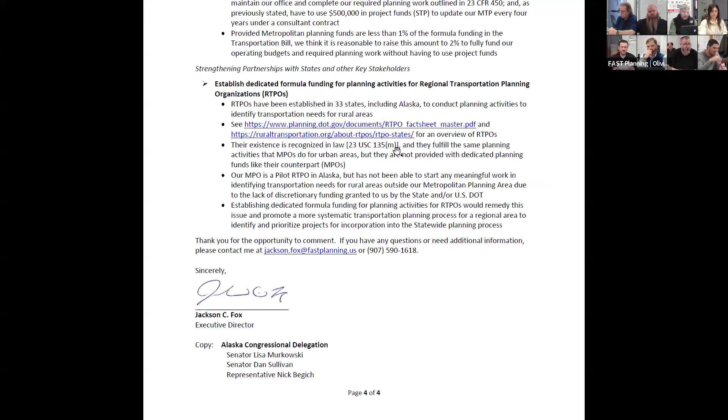Hey, hearing none, we'll move on to our public comment period. Is there any member of the public who wishes to provide testimony today? But anything not listed as an action item? And there are no action items, so even things on the agenda are fair game at this time.

Don't see any in the room. Anyone online? Okay, not seeing anybody online, so we'll go ahead and close the public comment period.

Move on to old business, Chena Riverwalk Stage 3 project update, which begins on page 18 of the packet.

As I stated in my staff report, the Chena Riverwalk has been on the policy board agenda for a couple of meetings, and it will continue at their April 15th meeting for some potential motions to make with relation to the future of this project.

As shown on page 18, you can see the current alignment as designed for the pedestrian bridge to Pioneer Park along the route on Peger Road is in a separated path along Peger Road up to Phillips Field Road. And then behind that is my staff memo to the policy board on some of these decision points with relation to the design, just as a refresher.

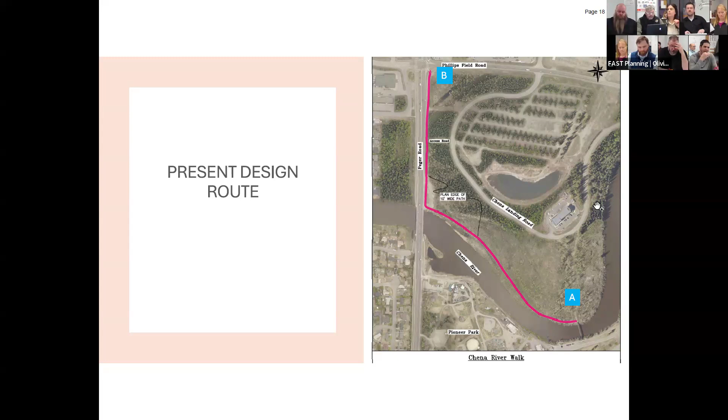On the design side, the construction estimate has risen from 1.7 million up to 7.1 million, largely due to the cost of the boardwalk structure. That's 1,378 linear feet along the riverfront there.

The current design tries to keep the path alignment outside of the floodway, but we've heard since from the community planning department that that's a permitting exercise. Potentially there could be construction in the floodway.

Really the next step for this project is to hire a structural engineer to take a look at the design, a geotechnical team and hydrology team to see what is possible to permit within the floodway, in hopes that we can shorten the length of the boardwalk to some extent to reduce the overall cost of construction of the project, since the boardwalk is the most expensive component.

So this is a decision point for the policy board on how to move forward with this price tag of the design. On the maintenance side...

Again, there is no signed maintenance agreement currently for the project. Previously, the project was moving forward underneath a maintenance agreement signed between the railroad and the city of Fairbanks under a land use permit. But now that the right-of-way acquisition option is outright purchase of the property, there's no need for that permit to exist any longer.

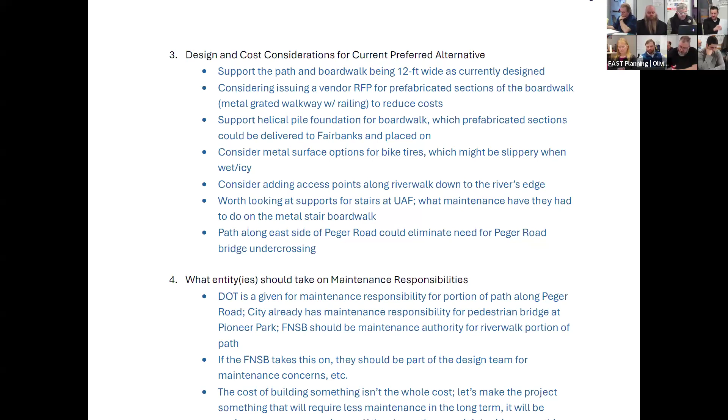All right, just a couple more, next page. As for consistency with local plans, they wanted to point out that the project has been in the Chena Riverfront plan for decades. For the last couple decades as well, it's been in our long range transportation plan and our first non-motorized transportation plan, adopted in 2012, and it's still in there in the 2021 update for our non-motorized plan.

It also directly supports the vision of the Pioneer Park Master Plan to expand the relationship with the Chena River, and is consistent with the statewide comprehensive outdoor recreation plan, which cites loops and strolling as highly participating activities in and around Pioneer Park. So bottom line on this page, the committee said: do it, move forward, don't change the alignment of the project. They have a lot of very specific recommendations as to how the project could proceed.

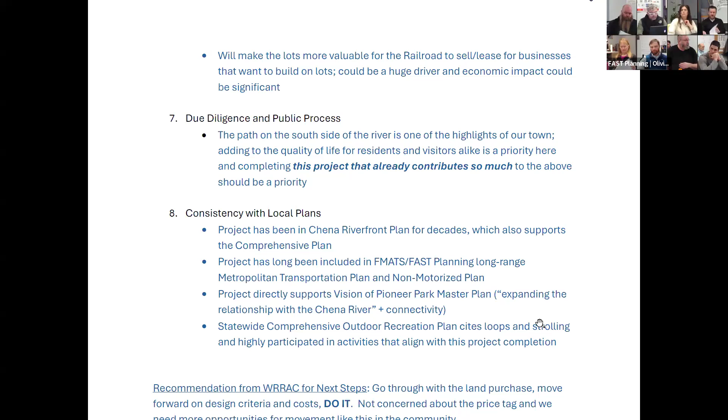And then behind that, beginning on page 26 and 27, was a copy of all of those local government resolutions and support from 1987 to present. There may have been some I've missed, but those are all the ones I had easily accessible on file for the project.

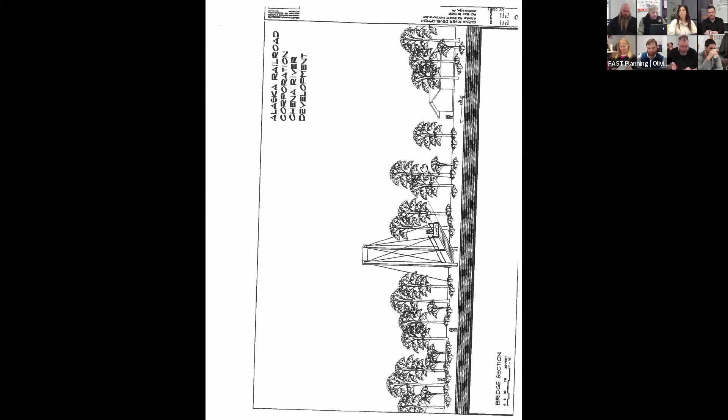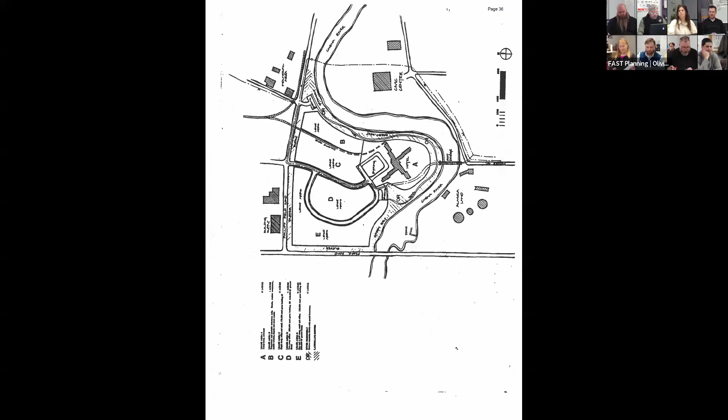Again, this is not an action item today. At the policy board meeting on April 15th, public comment period will remain open. Hopefully some new folks will show up to provide testimony regarding the project. So this is more of an informational update for you all to follow along, but happy to entertain any questions or discussion on this item.

Anyone in the room or online?

One second, talking about the Chena Riverwalk, I guess. 39 years of talking about it is enough. You're just going.

Okay, yeah, Kelly? I'll make a comment slash question. I'm not sick of talking about it, I've been talking about it for 16 years. The Chena Riverfront Commission has been really involved in this project as well.

I was a little surprised at the last technical committee meeting when the option was floated of not having the Riverwalk on the river, but rather on Chena Landing Loop Road. I didn't know that was really an option being considered. Would it be helpful to also bring that concept back to the Chena Riverfront Commission to see if they support consideration of that option, or was this project originally scoped just along the river?

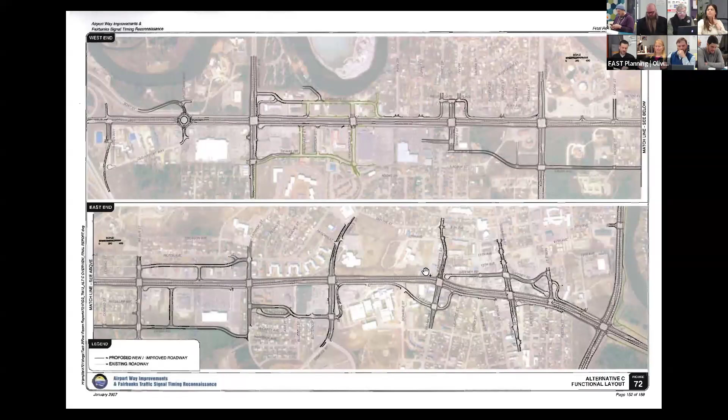One is a new signalized intersection at Moore Street, which is the entrance to Pioneer Park. Currently that's a right-in, right-out only. So if you're traveling eastbound, you can't take a left-hand turn into Pioneer Park, you have to go down to the Wilbur Street intersection at that stoplight, take your left-hand turn there, and then backtrack over to Pioneer Park.

And then another one I thought was interesting was on Barnette Street. It says convert Barnette Street to a two-way street from Airport Way down to 10th Avenue. Currently it's only a two-way street to Gaffney Road. But if you made it two-way down to 10th, it might improve access to downtown or even access to Barnette Magnet School and the clinic on the corner there. So that's a low cost, high impact project in my opinion.

I don't know that this has ever been discussed since 2007. I was kind of surprised when I saw it, I didn't remember that recommendation, but that could be a simple project if it's supported.

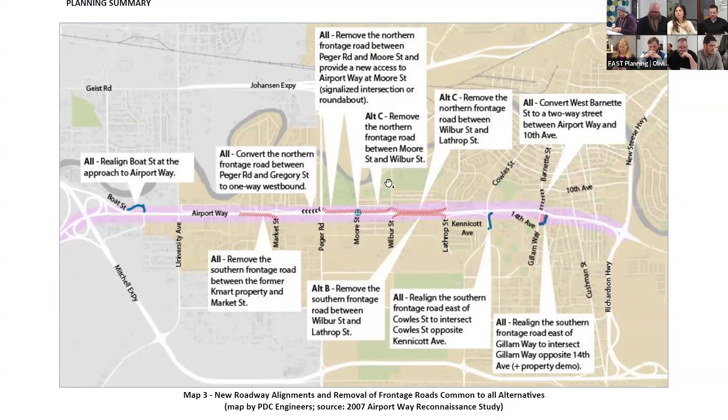Okay, and then last is the design toolkit and site specific recommendation. Cover for that report is on page 68. Olivia, if you go to page 72... all right, 73. So this was a two-part report. One was a design toolkit for beautification features on Airport Way, and then there was a second chapter for site-specific recommendations, looking section by section of Airport Way at what specific improvements would be good. For the landscape features in this design toolkit, I'll share a couple of them with you.

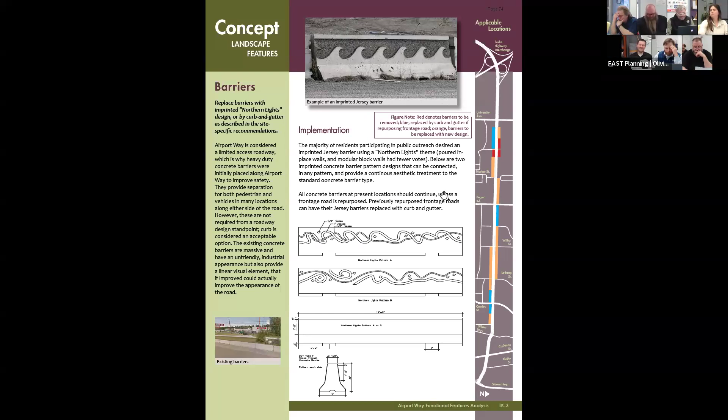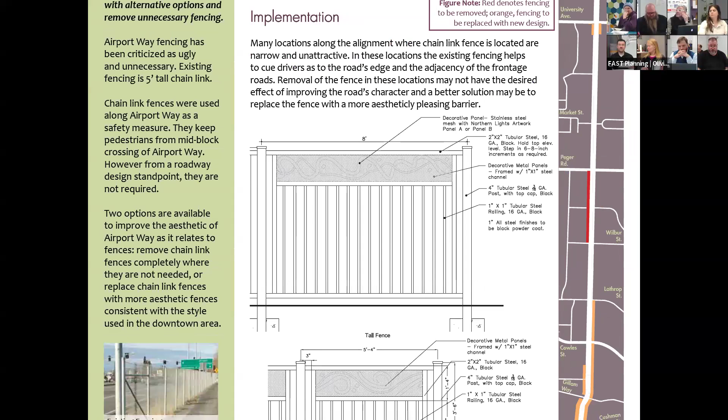If you go to the next page, it looked at a more aesthetically pleasing Jersey barrier on Airport Way, where the Jersey barrier itself would still stay. And then the next page shows potentially replacing the chain link fencing with more decorative fences, which would be an expensive project. You wouldn't necessarily go forward with this exact design, but any improvement or alternative to chain link, I think the public would appreciate. And then behind that is the site-specific recommendations.

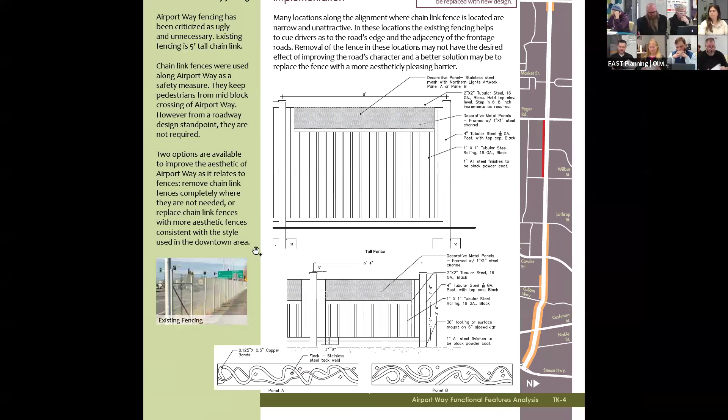There are descriptions of 7 different site-specific recommendations, but page 80 in the packet has an overview of those.

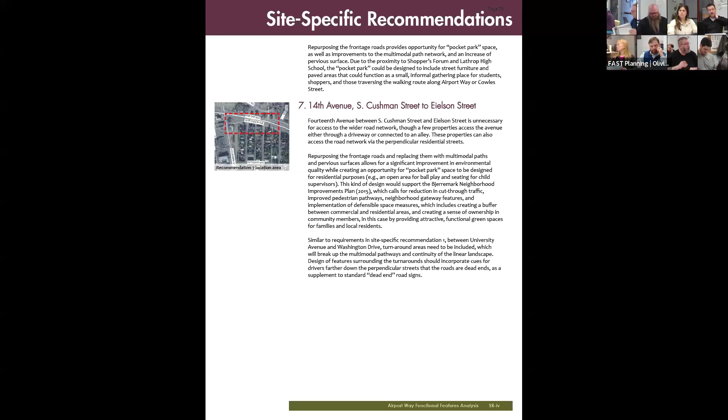Similar to the original study, a lot of these recommendations relate to not removing frontage roads, but converting them into bike and pedestrian corridors with improved, widened pathways and more landscaping features, while prohibiting vehicle traffic on some of those frontage roads.

Another interesting one is looking at Moore Street, as opposed to a signalized intersection there would just be an opening in the median. So you could do right-in, right-out at Moore Street, and make a left-hand turning movement into Moore Street, but you couldn't make a left-hand turn out of Moore Street. So you could do the northbound movement, but not the southbound left turn. That's an alternative to a signalized intersection there to improve access to Pioneer Park.

There was also discussion of a right-in, right-out at Pioneer Park's main parking lot along Airport Way. Again, that would be right-in, right-out, but with a new driveway providing direct access to the parking lot, as opposed to going down to Moore Street and taking a left into the parking lot.

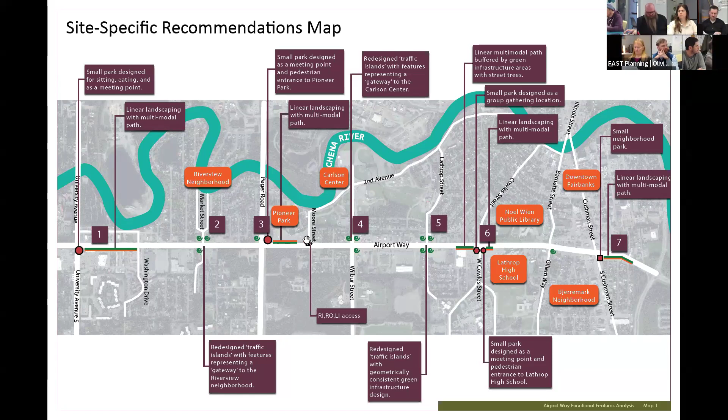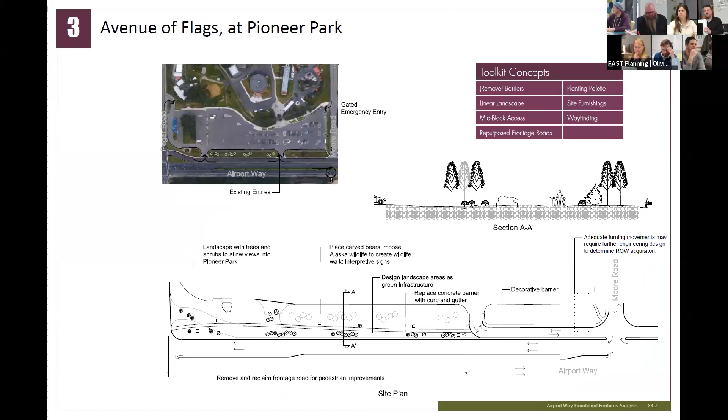There are figures associated with all of these behind this, but I'll stop there and see if any of these ideas elevate the need to pull them out of these plans and list them specifically in our long range plan, so they can be considered for advancing to design and construction in our next TIP document.

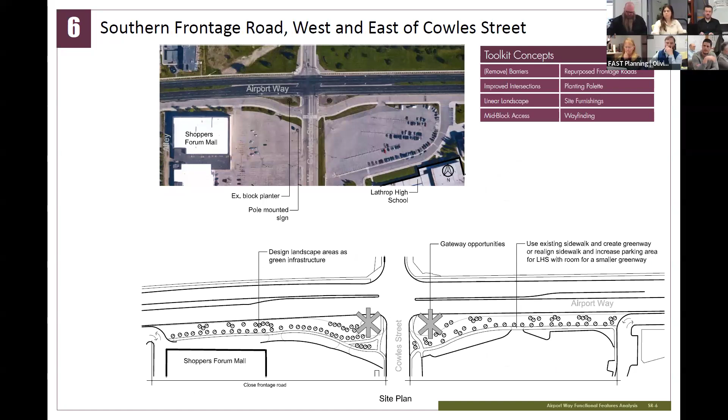We are going to be having the same conversation with Policy Board, as well as the Walk, Ride, and Roll Advisory Committee and the Project Enhancement Committee. So you guys are first up to take a look at this and think about it.

Yes, Tim? That Barnett at 10 — obviously we're looking at Barnett right now, so I wouldn't be against it. I remember Cushman used to be open from Gaffney to Temper for two-way traffic, and we changed that with the Cushman streets. There's pros and cons, like you say, but I never liked how abrupt Barnett is at Gaffney.

So I don't know if that can be incorporated into what we're doing now with Barnett. I mean, it should — that way we can do that typical, or at least consider it. Yeah, I'd like to see that get considered.

That's the type of input I'm looking for.

Yes, John? What initially got us zoned in on looking at all of Airport Way for some kind of improvements? Did we fall into some kind of money or something?

So right now, it was voted the ugliest road in Fairbanks as far as our public input process. And at our last steering committee meeting for our long range transportation plan update, we were talking about the needs assessment — it was a 2-hour meeting, and we spent an hour talking about Airport Way. So with the steering committee, it was a hot topic.

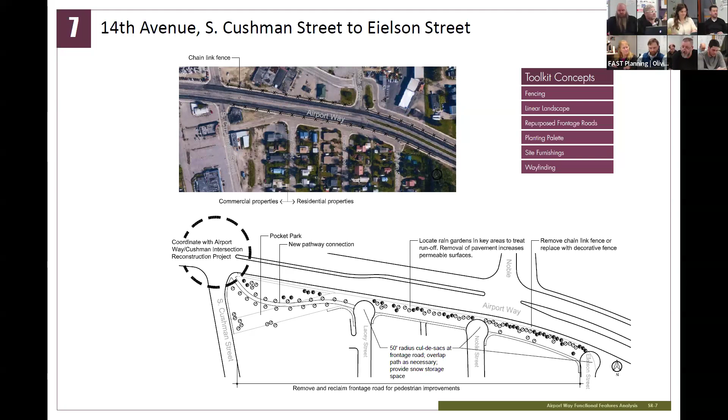Okay, Tim, and then we'll get to Jenny. So the Jersey barriers, I see the need for them, but I also understand that they're unsightly. I don't know if, obviously I'm new there, so I don't know if we can dedicate more resources to find a viable alternative. That'd be huge, because we have other areas that we need that type of protection. And if we can come up with a viable alternative that protects, but also beautifies, how can that be moved forward on?

I'd like to see action on that. It could be a project that makes pretty Jersey barriers. Maybe better to get a structural engineer or something. If you ever read the news, I see reports all the time where a person will take their car and go into a crowd for some reason. Why, I don't know, it's just the way society is sometimes. So when we put stuff on the street where people are unprotected, I don't agree with that. People need to be protected, but I also get into enhancing things and making things look better. So if there's a way to fund a project to like a structural company where they can come up with a rated crash-worthy barrier that is also aesthetically pleasing, we should try to move forward on that.

I guess just a more general comment. This one's a DOT maintained facility as well, so we're gonna have to work closely with DOT on any improvements that might happen, because I believe they're gonna have final say on that, versus us, in this instance.

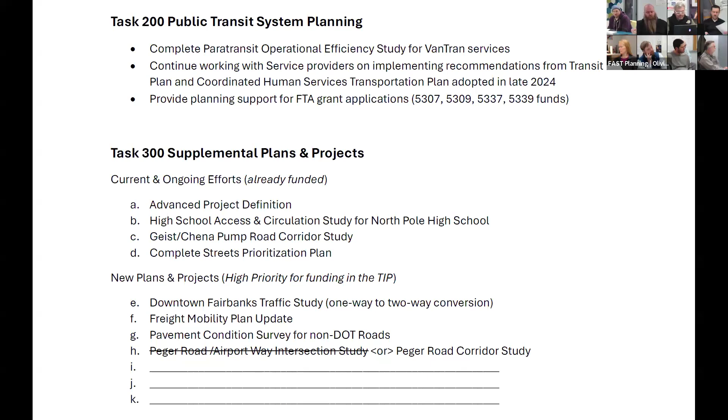This is not a high cost project, but it's data that I think will lead to better decision making, especially for the fast improvement program. The next page, page 94, is a long list of project ideas that have come up over the years - things we can kick off if we have extra funding. But I need to know if anything on this list really should be a high priority and moved up to task 300 so we propose funding for it within the next 2 years.

So I won't go through all of these, you can read the list yourself. A lot of these have been set aside as contingency plans for a number of years, not yet funded. But anyways, I just want to open up the floor. If you have any opinions on what I've identified as high priority that you don't think is high priority, should we move it down to task 400, or anything from task 400 you want me to move up to task 300 so I propose funding for it.

Once I have your comments, I can complete the draft of this document and bring it back to you all in May to release for public comment. So I'm trying to vet my outlook, and any changes you'd like to see.

Yes, Tim - I'd like to see Lacey Street moved from 400 to 300. Do you need a reason or is that good enough? That's good enough, it's your street. And we're very interested in Lacey Street. So is the public - 800 survey responses.

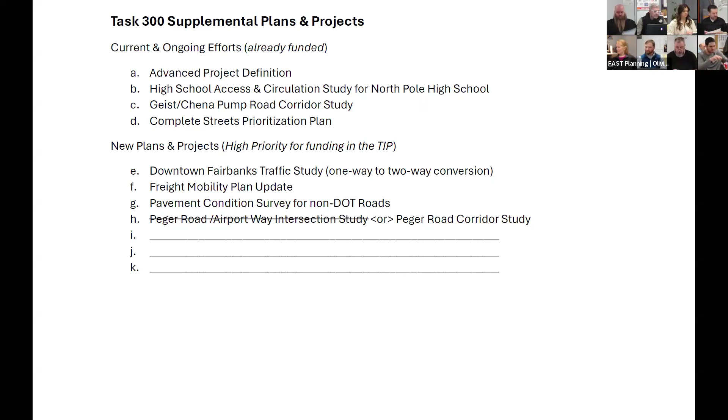Well, thank you for that. We got a couple changes. Okay, moving into informational items, page 95.

This afternoon, you will all receive an Outlook calendar invite for a workshop next Wednesday, April 8th, noon to 2 p.m. on the Highway Safety Improvement Program. We did a workshop last year in February for all of our committees, anybody interested in attending. We will have Nathan Stephen and Pam Golden from DOT on hand to talk about the Highway Safety Improvement Program, how projects are selected. They will showcase the projects receiving funding in the Fairbanks North Pole area, as well as other ones that might be in the queue for our area.

And then they will have a bunch of maps showing our crash data for the Fairbanks and the North Pole area, identifying high-risk locations that they would typically zero in on where new highway safety improvement program projects would be nominated.

You'll get an email this afternoon from Olivia with that calendar invite. It's optional to attend.

Was lunch provided? Yes, we're doing lunch for this. Okay, you should have led with that. Last year we had 22 people that came, but only 9 in person. So if we serve food we might get 20 of them. Man, I'm gonna miss that one too. We'll send you a picture. All right, thanks.

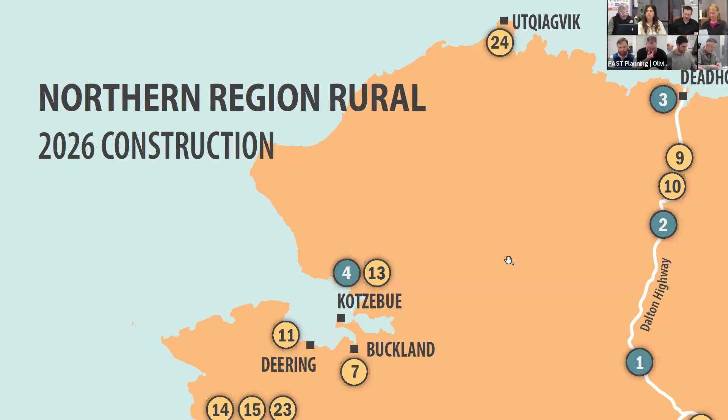All right, next informational item is the Fairbanks Area 2026 construction program. Olivia, go to page 97, the next page there.

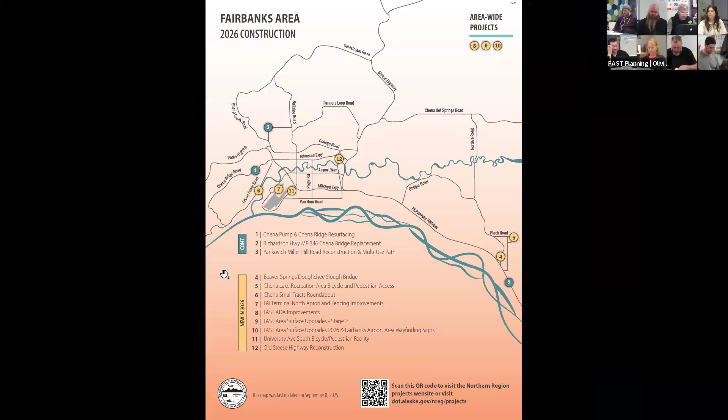This is the map I got from DOT for the 2026 construction program. It hasn't been published on the DOT website yet; it said the map was last updated in September 2025. I envision this will be updated and posted at some point. I wanted to give you insight into what will actually break ground this summer, versus things on this list that may get bid late summer or fall and not even go to construction. It's actually a pretty decent construction year for our local contractors from these items on the list.

Starting at number one, Chena Pump and Chena Ridge road resurfacing, that started last summer and will continue and be finished this summer. Richardson Highway milepost 346, the Chena Bridge replacement - I don't know the scope of activities this summer, but it might be demolition of one of the bridges. I haven't gotten an update, but that project started last year and equipment's been mobilized out there.

Yankovich Miller Hill Road reconstruction multi-use path - that started last summer. A lot of the work was focused on Miller Hill, but they will focus on Yankovich this summer to get that done.

New for 2026, the Beaver Springs Doughchee Slough Bridge - this is really repaving and improving the drainage around an apron leading up to the bridge so that the abutments aren't eroding any longer. I believe the design is complete, but it will likely be bundled with the fast improvement program and the Fairbanks area wayfinding signs.

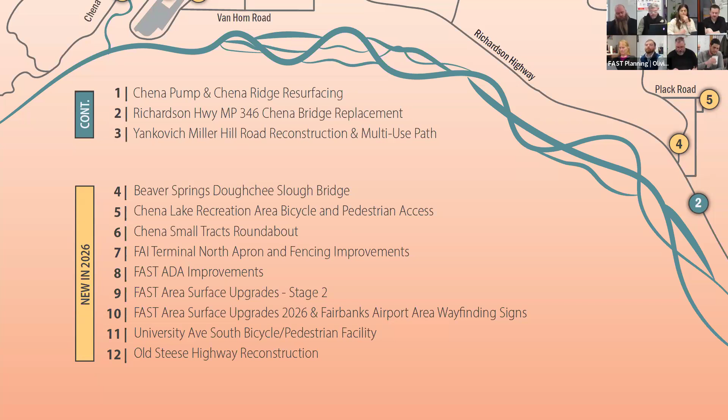I did have meetings with DOT planning and each of the project managers assigned to these projects, including John Retardas, Ethan Grates, and Yvette Hall. They provided dates for when these obligations will be turned in - a lot of it's May, June, July in that time frame. There are a couple obligations that will slip to 2027, so I'll be preparing an administrative modification to our TIP document, likely starting in May, to be brought forward to the technical committee or policy board in either June or July, but July is our drop-dead date for obligations. I'll let you all know I'm tracking this as close as I can. Anything here that's not going to get obligated, you've got to find a home for that money.

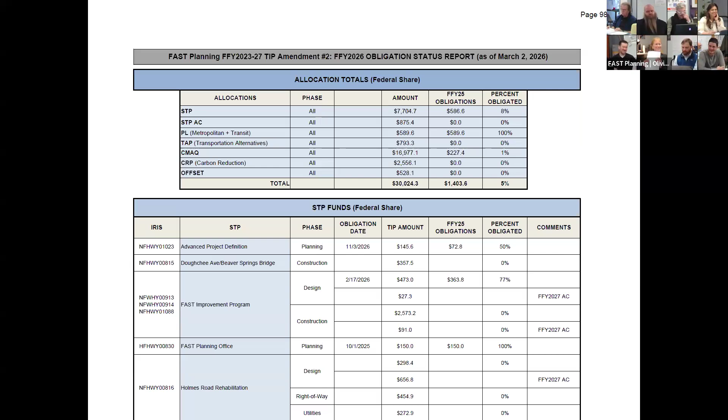Have you heard any updates from Federal Highways or FTA on the STIP amendment that was sent in? Have not, no, not on amendment number 2. Amendment number 2 has been approved for incorporation into the STIP by the DOT Commissioner's Office. It's been advanced to our federal partners for their final comments, but we haven't received that letter yet. But on the DOT side, everything's set us up for success.

All right, committee member comments. John - how much does it cost to print these every month? Like if y'all just buy 10 tablets or whatever, we could recoup the cost to use it over a year maybe of printing 400 pages. I can't imagine the time it takes to put all these little stickers on there. Yeah, that's what we're at.

Any other committee member comments? I wanted to say that I read that letter to the delegation and I really like it. I hope the policy board appreciates it.